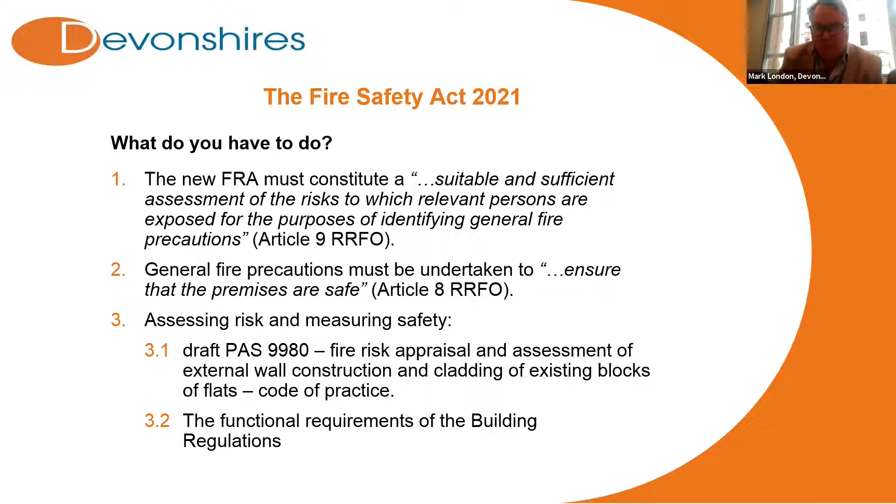So timeframes, well, as I've said at the outset, it's going to become law this year. You're going to have to carry out your fire risk assessment, probably review it annually, as you no doubt do at the moment, but it's really a question of identifying where you're going to start, because no one is going to be able to click their fingers and have descend into their organization hundreds of qualified fire risk assessors.

So where do you start? Well, it may be perfectly rational for you to take the view that you're going to look at your timber frame buildings first of all. We've had lots of problems with timber frame buildings, and some of the most significant fires post-Grenfell have been in relatively low-rise timber frame blocks. So you may take the rational view that that's where you're going to start your risk assessment.

But we do have a problem with resources. We only have a couple of hundred fire engineers in the country, and we only have a couple of hundred fire risk assessors who are qualified to do this sort of stuff. So the idea is that the MHCLG, in conjunction with the Building Safety Regulator and RICS, are going to try and upskill surveyors and other construction professionals to enable them to carry out these risk assessments. Whether that is going to be successful or not remains to be seen.

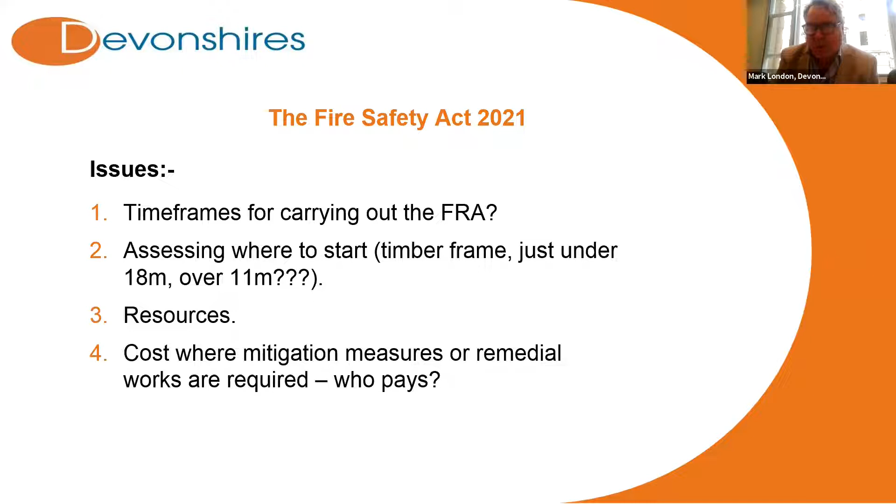Let's now move on to the Building Safety Bill. Now, normally when I talk about this, it takes me half a day or indeed an entire day. So I'm going to have to do it in 7.5 minutes. So in a nutshell, what does it do? Well, it creates a regime for higher risk buildings, which are going to be regulated by the Building Safety Regulator during both the construction and occupation phase.

So from the minute you start thinking about building a high risk building to the moment you start thinking about demolishing it. And of course, a high risk building, for present purposes, is a building over 18 metres in height or more than 7 storeys. Now that definition may change insofar as the Building Safety Regulator or the Secretary of State identify or see that there is a need to reduce the height. And we all know, of course, that tall buildings in Scotland are 11 metres and above. Then the Secretary of State has the power to do that. So the definition of a higher risk building is not set in stone.

And the idea is that the regulation covers both, as I say, the construction and the occupation phase. It creates a new building control regime. The local authority building control is going to be far more forensic, far more difficult for building control officers. We're still going to have a version of the old approved inspectors, and so they will still be with us, subject to, of course, being able to get professional indemnity insurance.

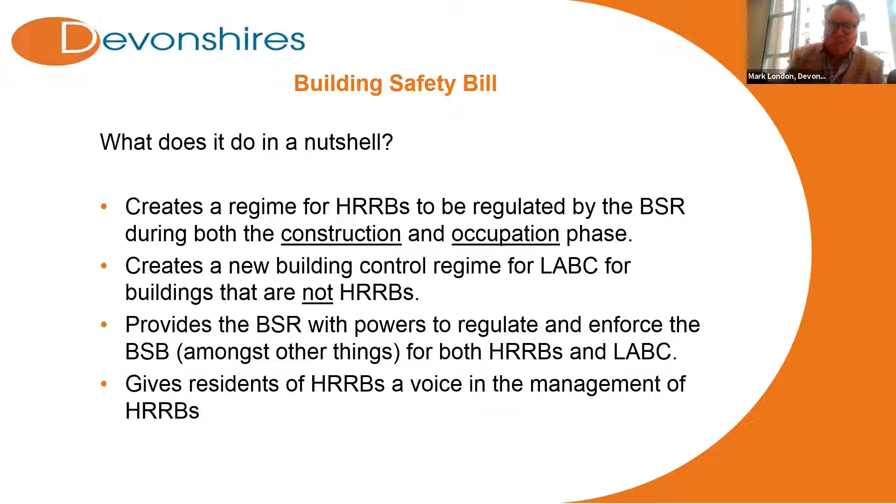So let's look very quickly at the construction phase. There are going to be three gateways. Gateway 1, as I mentioned earlier, is coming into force in August of this year. That is the planning permission stage, where you have to submit a fire safety statement, and that fire safety statement will then have to be approved by the building safety regulator. You then move on to gateway 2 on the assumption it is so approved, and this is the gateway that you have to pass through in order to be able to actually put a spade in the ground and construct your high risk building. And you're going to have to supply detailed plans to the building safety regulator showing how the building will comply with building regulations, structural safety requirements, etc.

Now, I know others are going to talk about the need to use BIM and the golden thread. And let me just say this: if you are not intending to use BIM, but you are intending to construct a high risk building, then you are going to be in serious trouble. It seems to me that it is going to be virtually impossible to comply with the golden thread requirements and the transporting of information throughout the lifetime of the building without having a concrete BIM model right at the very beginning.

Gateway 3, the occupation phase. You get to practical completion, but of course practical completion is now no longer the test of whether you can actually put people in the building and occupy it. You're going to have to get your license to occupy from the building safety regulator, and in order to do that, you're going to have to submit your golden thread of information in the form of a building safety case. And your principal designer and your principal contractor are both going to have to declare that the building meets the requirements of the building regulations. Now, this is a hard stop again. You cannot occupy the building unless and until you get your building occupation certificate. So the gateways are a hard stop.

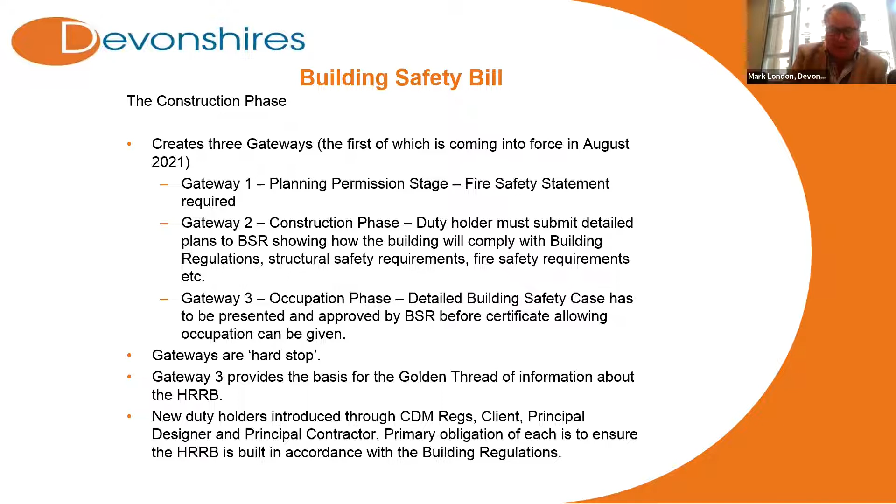Right, well, let's talk very, very quickly, I've got a couple of minutes left, about the accountable person and the principal accountable person. They are the people with whom the buck stops. Now, the principal accountable person is a new introduction to the Building Safety Bill, which was made in its most recent iteration to deal with the fact that you could quite possibly have more than one accountable person in a high-risk building. And the bill contains a mechanism for determining who is the principal accountable person in the event there is a dispute. And so for lawyers, it's going to be fantastic trying to work out who is the principal accountable person.

But the principal accountable person is the person who has the majority of the obligations during the occupation phase. Don't fall for the point that the building safety manager is the person that has the overriding obligation. That is not the position. The accountable person is the person who has to identify and manage fire safety and structural risks within the high-risk building. It is the building safety manager who manages the building in accordance with those risk assessments. And that is why the severe penalties, the really nasty stuff in the Building Safety Bill, is reserved for the accountable person.

So I know lots of organizations are running around at the moment trying to find building safety managers, and everyone's setting up frameworks to appoint them. And we don't quite know what the qualifications are going to be yet, but we will hopefully very shortly. But actually, the real focus, and my top tip for you today, is not necessarily to get sidetracked by thinking too much about the building safety manager. That is obviously important and necessary. But what you should be doing as an organization is working out who within your organization, who are the team of people that are going to discharge the obligations of the accountable person, because it is those obligations that are by far and away the most significant and the most serious.

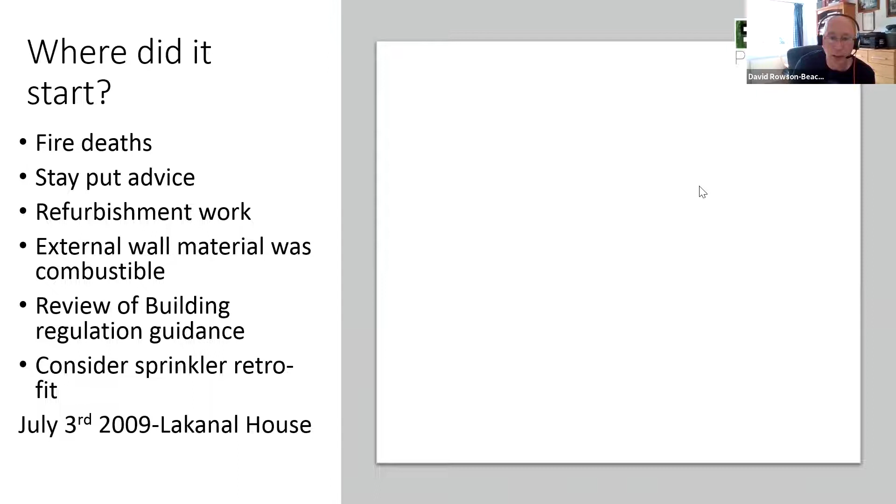So we all know where it started. We had a number of fire deaths. We had issues around the stay put advice at that fire. There was refurbishment work going on. The external wall material was combustible. There was a review of the building regulation guidance required. And after the event, they were asked to consider sprinkler retrofit, but it wasn't Grenfell. Next piece, please. And the next one, please.

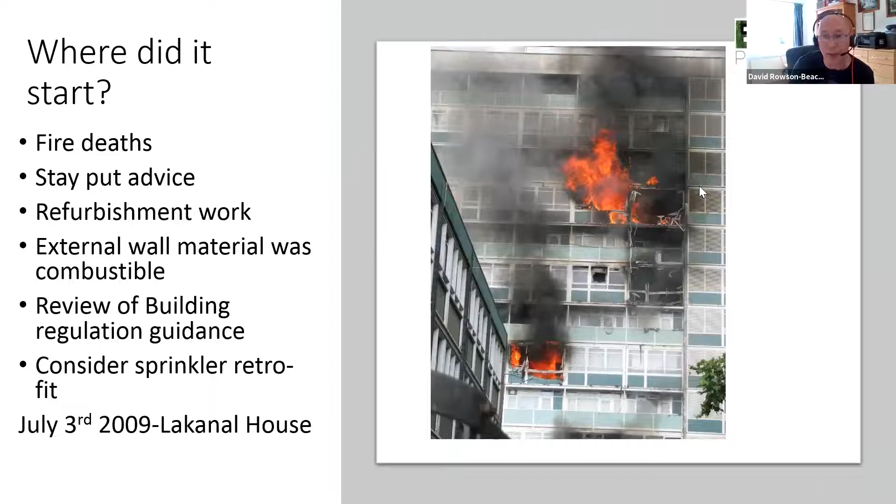Lakanal House 2009. Those things that were mentioned back in 2009, what are we looking at now, 12 years ago, kind of fit the same pattern of events that happened in Grenfell in 2017. So there is a big argument about some of those things not being reacted to at the time. Can we have that next slide, please, Jessica? There you go. I mean, you've seen that picture 1,000 times. I don't think it ever loses the power to make you think in great detail about what happened. Next slide, please, Jessica.

So the question is what has this got to do with new build schemes? Because both Grenfell and Lakanal were primarily around the refurbishments of buildings. And I know this is a new development forum, and you could be asking yourself, well, really, is it relevant? Can I have the next slide, please, Jessica?

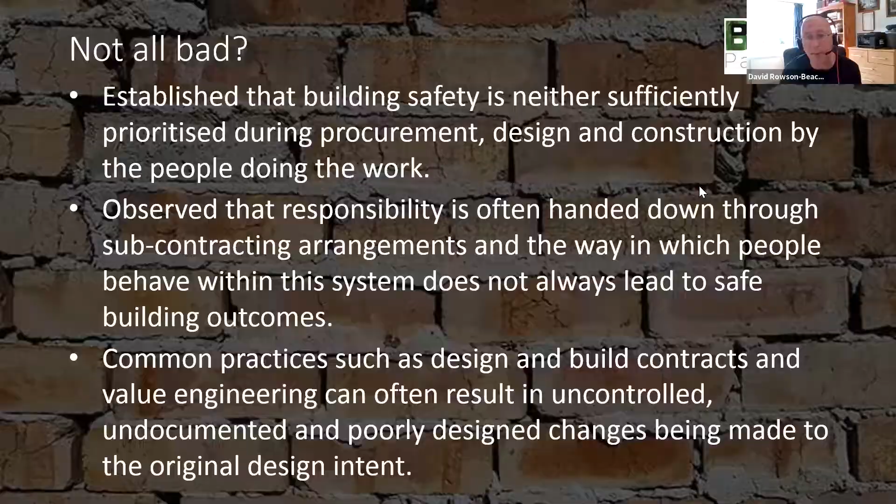So it's not all bad, is it? But Dame Judith Hackitt, who you'll see on the next slide as well, in her report, Building a Safer Future, where there was an interim report and a final report, stated that building safety is not sufficiently prioritised during procurement, design and construction. And you will see that she's made some other statements there, which you can come back to and you're probably well aware of and familiar with. Next slide, please, Jessica. And again, there she is. She's a bit of a pin-up of mine now. She's done some brilliant stuff.

And just to reinforce that, I've now lost count of the amount of new build schemes that I've been to where there have been significant failings resulting in delayed occupation and some pretty extensive costs to remediate. So the urgency to get a scheme completed can sometimes be to the detriment of the build. Can I have the next slide, please, Jessica?

So what else can I do? You could ask. You could say, I've had in my schemes previously some brilliant architects. I've always used some really good engineers, and I've included in that fire engineers. I've used building control and I've met the minimum standards. I've had the fire service involved in the schemes. They've approved the drawings and they've been on site even during construction phase.

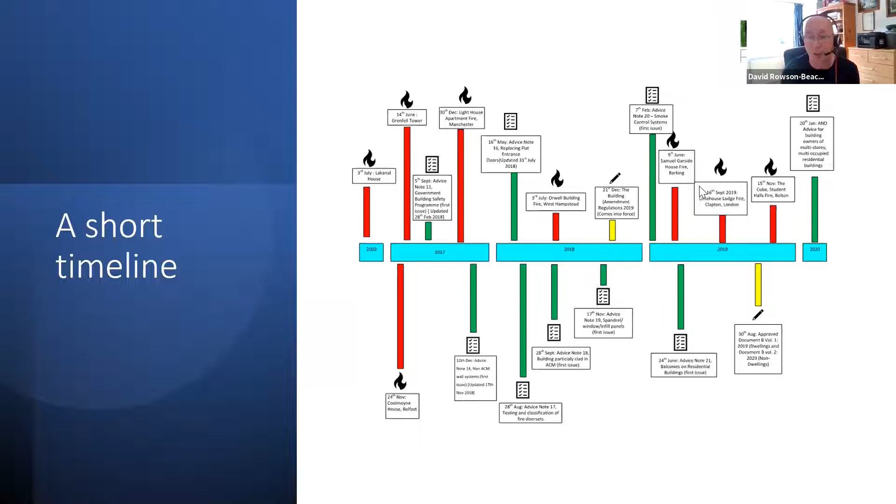And there's the timeline for Dame Judith. And can we have the next slide? And you will notice it's a bit of a whistle stop. And I'm sorry for all of this because, like I said, I hope the slides are going to be more informative to you afterwards. There's a short timeline up until 2020, which showed a couple of fires and some MHCLG building advice notes. So for those that disagree, let's go to the next slide, please, Jessica.

Okay. There it is, Orwell Building, West Hampstead, July 2017. As Mark mentioned in his presentation, there was a period of time immediately following Grenfell where we had some, in inverted commas, significant fires, or certainly high profile fires. And this building, and in fact all the buildings I'm now going to show you, were buildings under 18 metres.

So Mark's referred to higher risk buildings. That's the definition under the Building Safety Act. And higher risk buildings are defined as those buildings currently over 18 metres measured from the highest habitable floor down to the ground. Now, Orwell Building was a joint venture. And my apologies to anyone in this room that may have association with any of these fires. I could have picked out a number of fires, but I've just picked a few out. This was a joint venture by Ballymore and Network Rail.

Timber balconies with the frames wrapped in ACM. It did have sprinklers, but there was significant damage from smoke spread and from water damage, ironically, from the sprinklers. And this was caused by a discarded cigarette. Now, with all of these fires, in theory, the fire should stay within the compartment. Generally, the compartment in the case of our blocks of flats are the flats themselves, the dwellings. Our common areas are sterile, so unless somebody goes in there with a sofa or a can of petrol and sets light to it, we're talking about the dwelling.

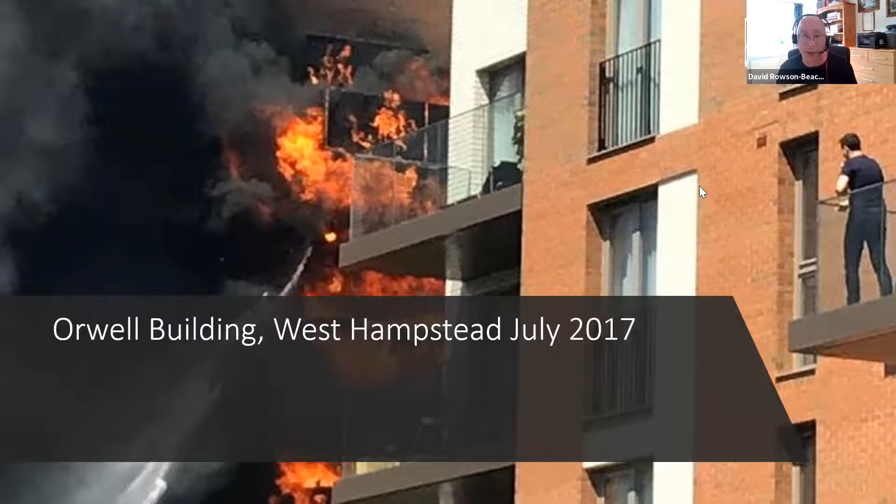So all of these pictures, think about it as this, that it should have stayed within the room of origin or the flat of origin, and shouldn't be spreading up the outside or through the building in a quick amount of time. Could you go to the next slide, please, Jessica?

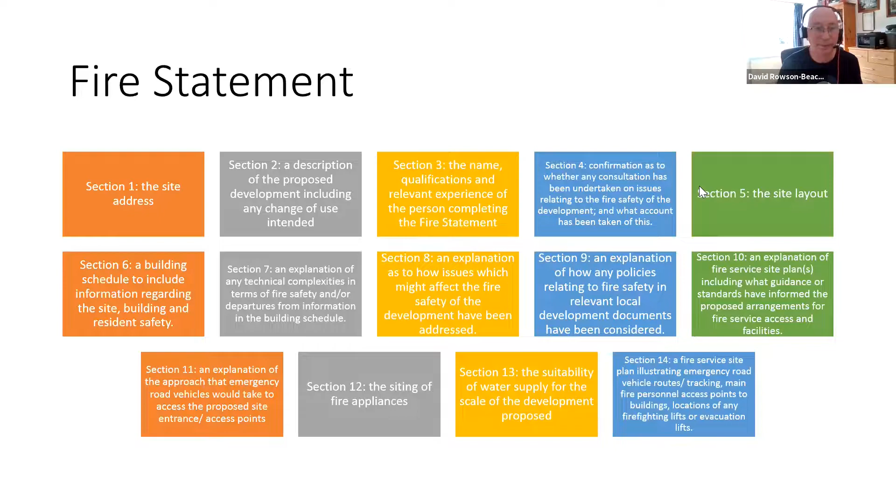You may be very fortunate enough to have fire safety professionals in your organisation. You may need to employ fire safety professionals from elsewhere. But if you go onto that link, those RIBA stages will tell you what's required at what stage.

Now, one thing that I have put in here's my presentation, look, there's my notes, that's it.

But one thing I've put on there is the thing that surprised me the most in all of this, bearing in mind that I've worked with this before Lakanal and since Lakanal and before Grenfell and since Grenfell, is, with all due respect to everybody, I've never seen so many experts coming out the woodwork, who I never saw before Grenfell, and now I'm awash with them. So I'm really pleased that we've now got all of these experts giving us all this great advice. I just wish they were there before Grenfell, and I'm glad they're there now. Can I have the next slide, please, Jessica?

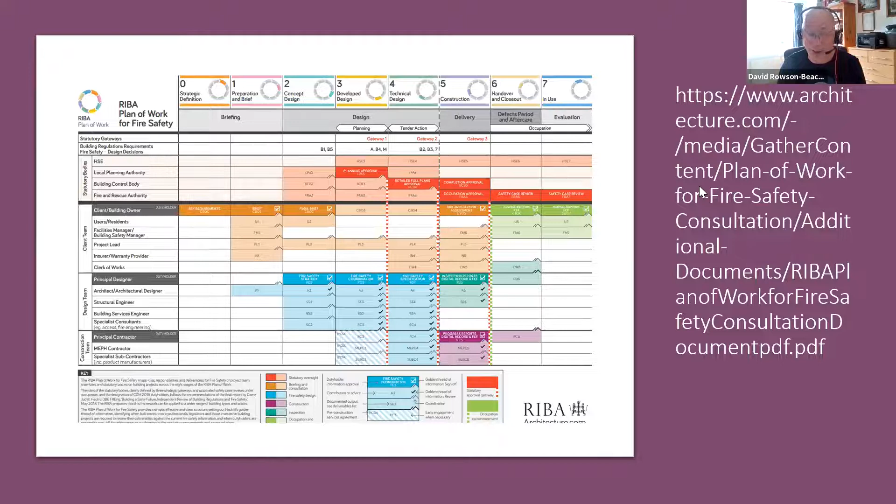So what else? Okay, so we spoke about the practical elements. So procurement's a big one. The procurement of contractors, of the work you're doing, whatever it is, procurement is under the magnifying glass at the moment. It's part of the competency framework. Within that competency framework, they're asking for a lead procurement officer, and that lead procurement officer should have a certain amount of fire safety knowledge in order to oversee the appropriate procurement of any fire safety services.

Competencies. Again, third party is not a legal requirement at the moment. It's the preferred standard because you can audit somebody from the very beginning of the process to the very end. But even so, with third party accreditation it may be that I have one person that's registered under a third party accreditation scheme and they're overseeing 20 people. I've been to many a project which has been worked on by third party accredited companies that have been disastrous.

So it's about the competencies of the people you employ, whether as contractors, whether you have subcontractors coming in, or whether you use your own staff, your own in-house staff have those required competencies. So those are the things you've got to start thinking about going forward. Building relationships with your contractors. I mean, I just gave contractors a really bad name there by saying I've seen some awful contractors, but by the same token, there's some excellent contractors.

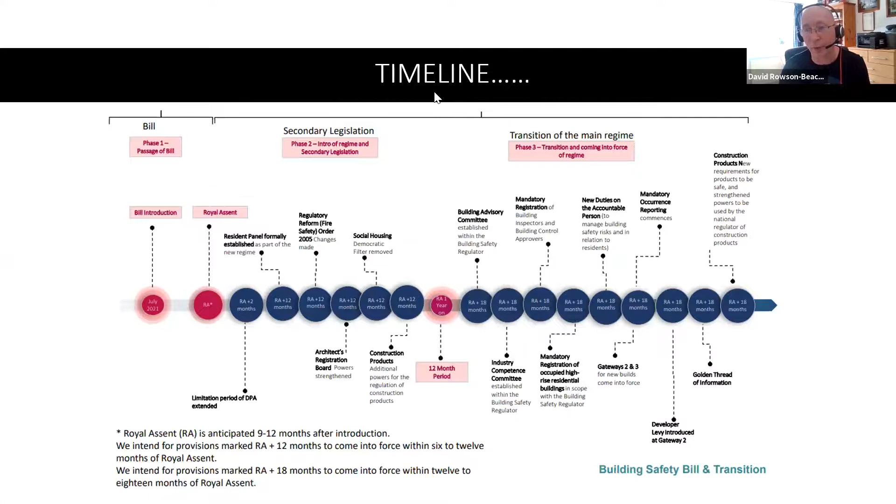Can I have the next one, please, Visakha? There you go, there's a timeline. And again, just to back up what Mark said and to build a little bit upon what I said, there is the government timeline on the introduction of those things coming through in terms of the legalities of things. Next one, please, Visakha.

And there you go. I think, is that my last slide? Again, what I've done there, it's again for your use. Some of those documents that I've referred to or haven't had the time to refer to are there. Just copy and paste, put them into your search engine and have a look at them at your leisure. Don't be overwhelmed. There is a lot of information there, but don't be overwhelmed. Like I say, everyone's in the same boat and together we'll get there.

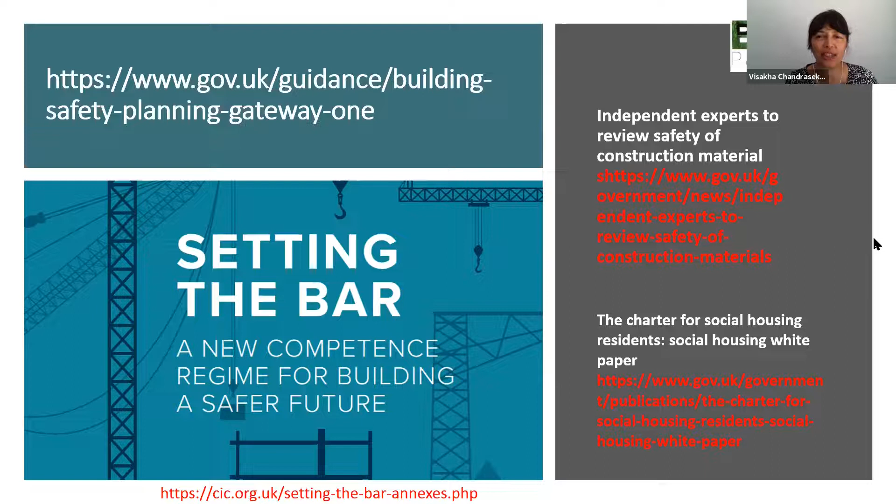Okay, well, Mark, you are a partner at BPTW and you lead on design technology. We've had a couple of references already today around the use of BIM. I think it was Mark, maybe it was Dave, who said how essential that would be, particularly to the development of tall buildings. So without any further ado, I'm going to pass over to you.

Thank you. Hello, everybody. It's good to be here today. I'm responsible for BIM services at BPTW, and I'm involved in industry bodies that relate to BIM, like BIM for Housing Association and the Golden Thread Initiative. My focus today is on BIM and how it relates to the Building Safety Bill. Just a thank you as well to Mark and David for their excellent presentations, and hopefully that sets us up to talk about BIM.

So next slide, please. And the next slide. And the next slide.

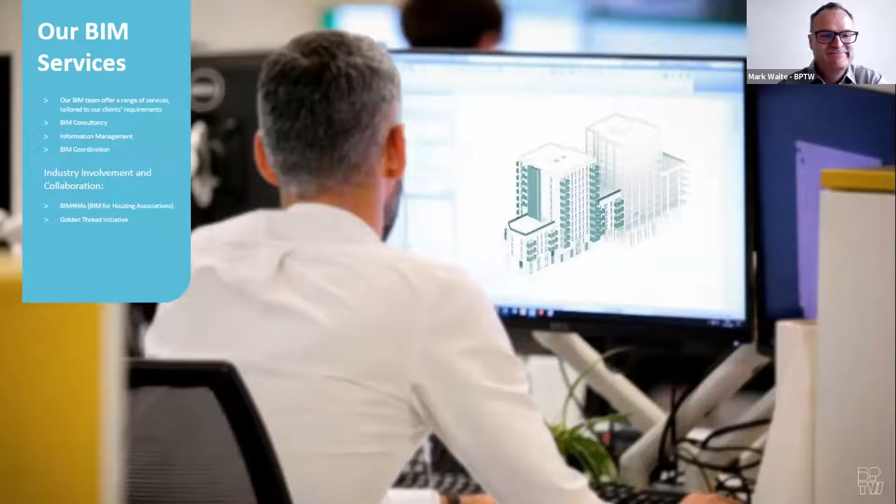So firstly, I'd like to give you a quick overview to show the building safety timeline against the BIM timeline. So the UK construction industry first became fully aware of BIM in 2009 when the government appointed Paul Morrell as their BIM advisor. He implemented pilot projects and delivered such successful results that the government set a mandate that all publicly funded projects had to be undertaken in accordance with what was then BIM Level 2 by April 2016. The mandate came and went with little real impact on the housing sector because it didn't directly apply, so uptake was quite slow, to say the least.

Everything was brought back into focus by the appalling Grenfell tragedy, of course, in 2017. Dame Judith Hackitt then delivered her Building a Safer Future report in 2018, which recommended wholesale reform of the procurement, design, delivery and management of high-rise residential buildings. The Hackitt report in 2018 recommended the use of BIM in order to deliver critical information and the appointment of accountable individuals to take responsibility for the safety at each stage of a project. The report made 53 recommendations, and these were adopted by the government, which published the draft Building Safety Bill in 2020. 2 weeks ago, the Building Safety Bill went to the House of Commons.

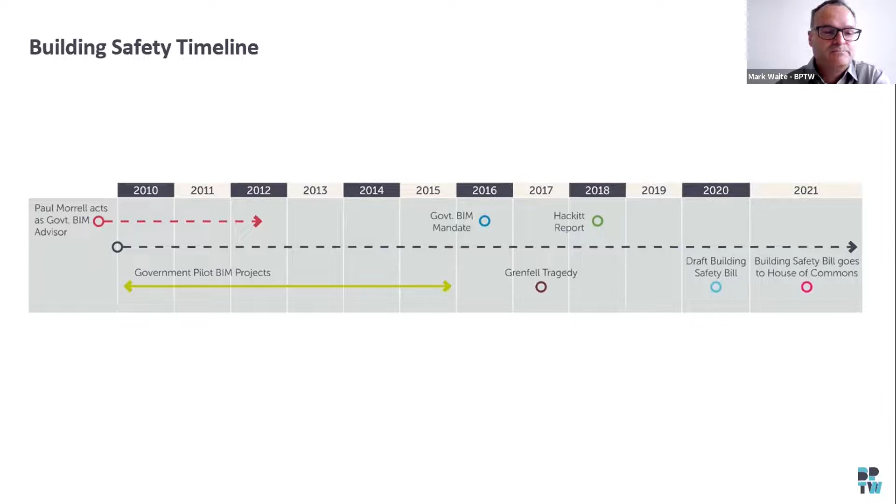Now, obviously, the bill will have a huge impact on the way we work with major financial implications. There will be financial implications to clients, of course, but there are also major implications to everyone else involved on a project. We will need to change our culture and the way we work to ensure that we can deliver in accordance with legislation, which could come as early as 23. So for the people who think we have time, there really isn't any.

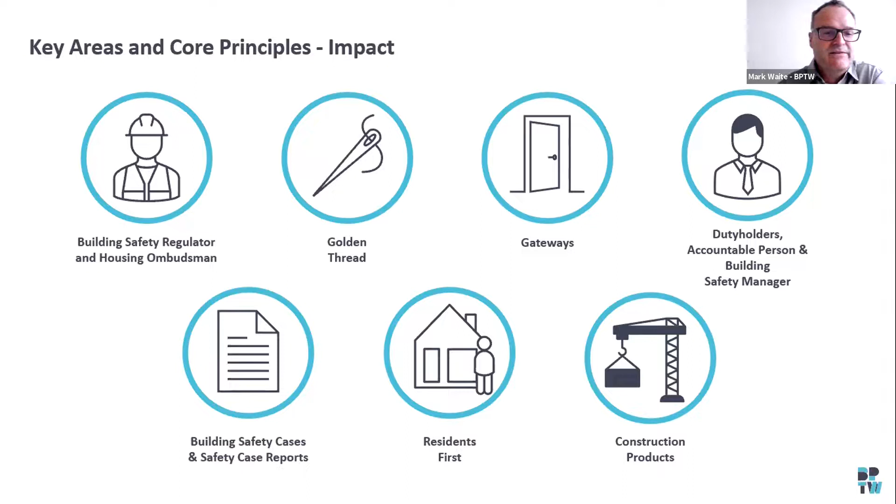So what is BIM and where does it fit in? So BIM is information management. At the heart of every BIM project is information, from cost information, construction sequencing to sustainable design. BIM provides a method of collaborating and communicating effectively to manage digital information at every project stage. BIM is information modeling, a way of collaborating and communicating effectively to enable the management of that digital information at every stage of a project.

At the heart of every BIM project is a 3D model, with key information embedded within that model. The decision as to what information is to be embedded and then provided at each stage of the scheme is made by the client and the project team at the earliest possible stage, and is primarily geared towards delivering the information required by the building owner to manage and maintain the building safely now and in the future. To provide clear BIM deliverables, it's therefore really important that EIRs are created. Now I'm getting into BIM terminology here, so bear with me, I'll try and be as clear as possible.

EIRs are exchange information requirements and AIRs are asset information requirements. They're very specific BIM deliverables, and these should be produced by the client. These requirements clearly state what information the client needs, in what format, and at what stage of the project. A BIM project can only be undertaken successfully when the end user, the building owner, has produced these documents. Regrettably, it's often the case we're still asked to just deliver BIM. So at tender and feasibility stage, as architects especially, that's basically what our clients say. So they really need to have thought through their information requirements at a very early stage. BIM relates to the golden thread, which, as I've mentioned, is a core part of the Building Safety Bill.

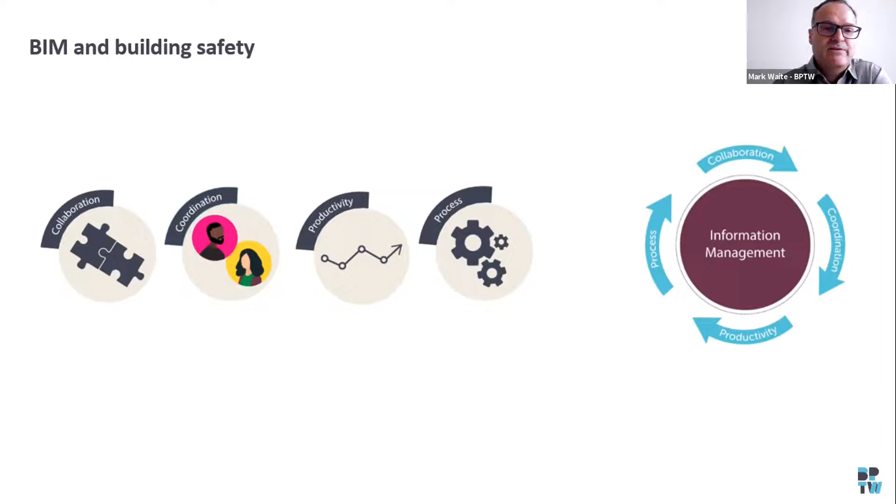The Building Safety Bill states that the golden thread must be delivered on all future high-rise residential buildings, as we've covered in the previous presentations. It does not say BIM has to be used in order to deliver it. So it's quite important, because I've had quite a lot of people say, is BIM really needed and is it in the bill? It isn't. So whilst there are other digital approaches you could take to deliver the golden thread, BIM is a tried and tested approach which is likely to find favour with the Building Safety Regulator. If BIM is used correctly, it is therefore the best way to deliver the golden thread of information.

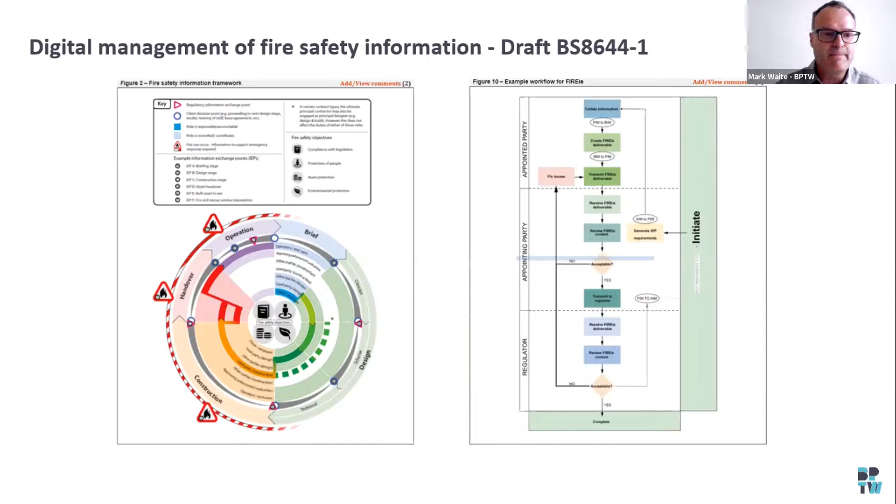Next slide, please. So David has touched on this in the previous presentation also, but in addition to the golden thread, the government have introduced 3 new gateways, which the diagram shows. Gateway 1 requirements have been published, and at each of these gateways, the duty holders, which I'll mention shortly, have a requirement to submit certain information to demonstrate that they've considered the safety of the building throughout the design, construction, and operation of the building.

For Gateway 1, applicants need to demonstrate that the planning application incorporates thinking on fire safety, where it relates to land use planning. Specialist fire safety expertise is to be provided to local planning authorities on a statutory basis. And as we've touched on already, this begins in August this year.

Now, it's important to note BIM is not a requirement of the legislation, as I mentioned earlier. However, it makes sense to use an existing standard and framework for the delivery of the legislation rather than making up a new one. And in most people's eyes, it is agreed the use of the UK BIM framework and BIM, which is part of the BIM ISO standard, is seen as best practice to achieve this. So deliver the information that allows you to understand the building, e.g. the golden thread, of course.

Each of the gateways, at some point, you need to define what that information is. Instead of creating a new document or a new way of doing this, it already exists within the UK BIM framework. These are the asset information requirements, which are issued to the supply chain at the beginning of a project, along with the other BIM deliverable documents, which are EIRs, OIRs, and PIRs, more acronyms for you, which everybody loves in the BIM world. So in addition, within the UK BIM framework is the level of information need and COBie, which I touched on already.

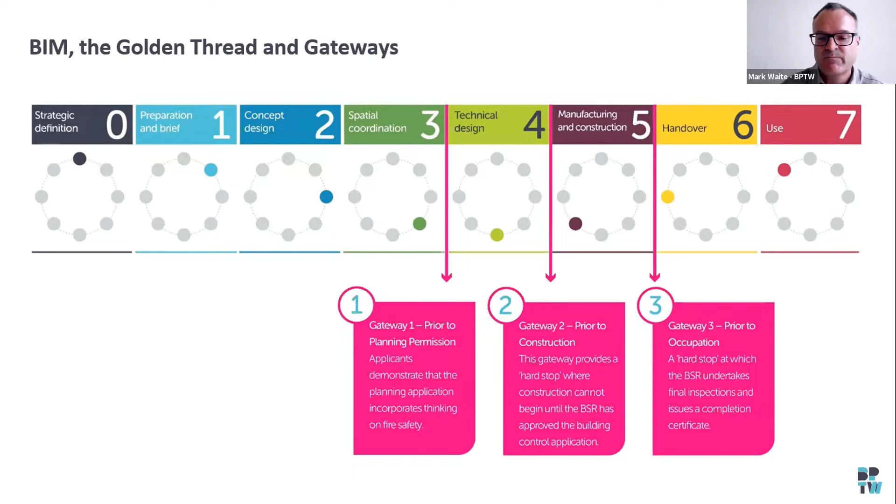The fundamental reason for the UK BIM framework is to set out this process for successful information management, which includes the coordination of information. Some of the key ISO items include the CDE, which I've mentioned, as well as the use of responsibility matrices and information delivery tables to plan out the process.

Moreover, the ISO 19650 introduces the information management function. This function sets out how information can be managed and controlled throughout the life cycle of a project, and the information management activities can be performed by these duty holders to allow them to comply with the Building Safety Bill.

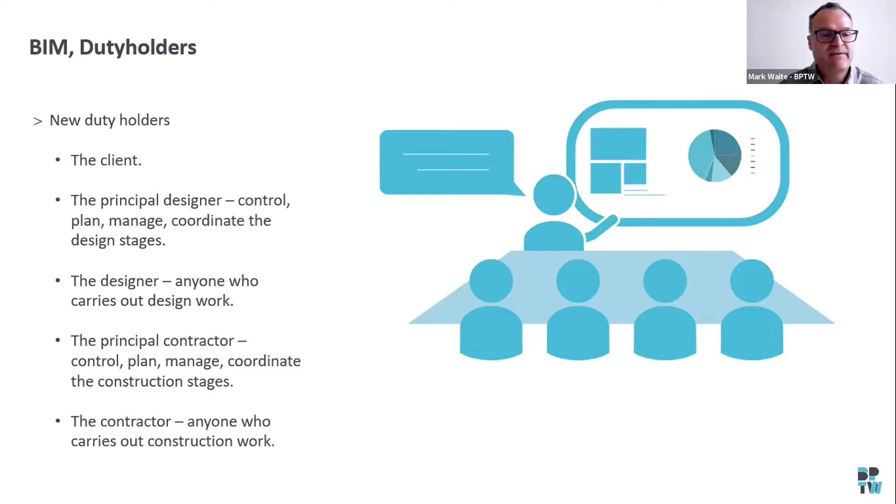Finally, after a building has been designed, constructed, and passed through Gateway 3, the accountable person must maintain a live building safety case for the building, demonstrating that risks are continuously reviewed and managed to ensure the safety of the residents. Fundamentally, this part of the legislation is the building safety case, which cannot be created if it is not built on a robust set of information, the golden thread, which BIM provides.

Furthermore, keeping the building safety case live is not to be underestimated. This will be a big task, and some considered approaches may be needed to update the building safety case based on trigger events. When you review the ISO 19650 Part 3, as the ISO standards are in a number of parts, this one specifically sets out how trigger events can cause new and updated information to be produced and managed. These trigger events can be scheduled through planned maintenance, whilst others could be unexpected.

The BIM ISO sets out different pathways dependent on each type of these trigger events. So by using the standard, again, to plan your trigger events or your response to unexpected trigger events, you will be able to maintain your building safety.

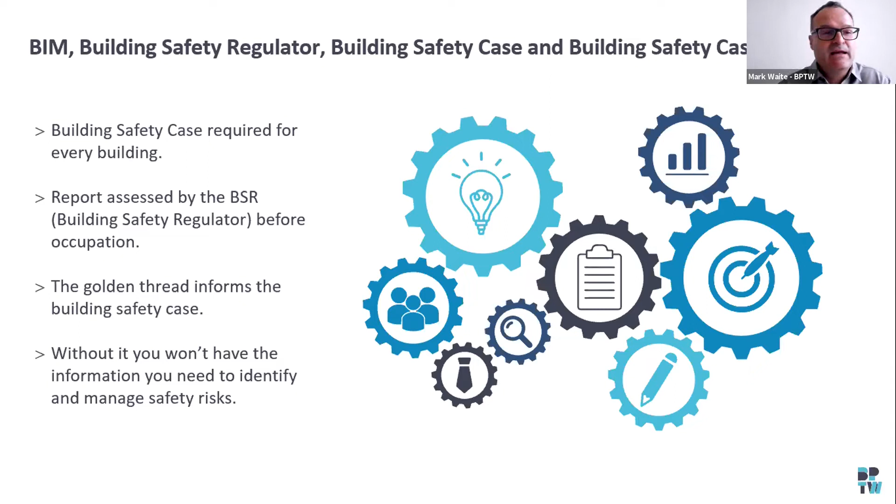So, in conclusion, the Building Safety Bill brings significant changes to every aspect of delivery and management of high-rise residential buildings. It requires that digital information be used and developed, and that all organisations involved in these processes commit accordingly. Building owners and appointing parties should look to implement BIM, engage with information managers, which is a specific role mentioned within the BIM standards, and develop their own digital information requirements for future and existing projects, because they need to be able to receive and use the digital information for new and existing stock.

The client needs to specify what information they need in order to manage their assets safely, in what format they require it, and at which stage or gateway of the project. Under the BIM standards, this is known as the Exchange Information Requirements and the Asset Information Requirements. So in order to develop these two key documents, it's likely they will need to work with an information manager who is fully conversant with digital technology and who can assist the asset teams, development teams, and IT teams to interrogate working practices and identify the information needs of the organization.

BIM for HA, which I mentioned earlier that BPTW are a part of, have just produced a toolkit which forms a suite of template BIM standards that can help to produce these BIM requirements. But they are very much templates, so BIM expertise will still be required to incorporate these into a specific organization.